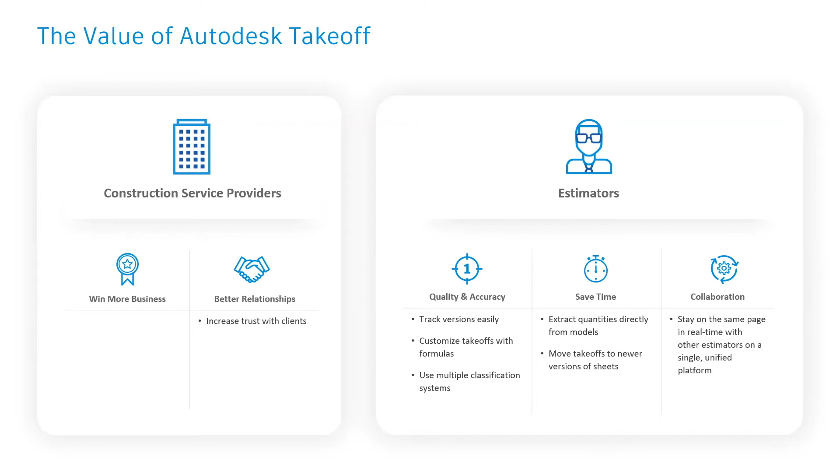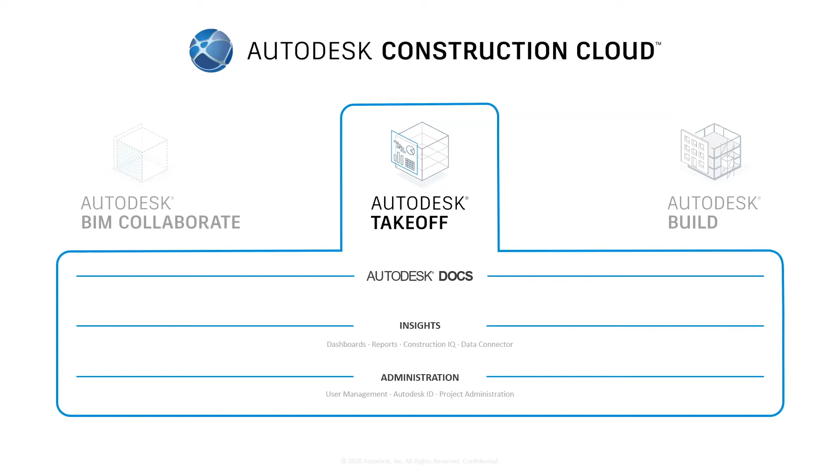Autodesk Takeoff is just part of our unified platform for the Autodesk Construction Cloud. The Autodesk Construction Cloud connects data, workflow, and teams throughout the entire building lifecycle, from design to operation, across headquarters, office, and job site. We recently announced 3 new additions to the Autodesk Construction Cloud: Autodesk Build, Autodesk Takeoff, and Autodesk BIM Collaborate. They all build on a unified platform, the common data environment, and these new modules empower general contractors, different trades, designers, and owners to drive a better business outcome.

So this is where Autodesk Takeoff resides in the platform. Now let's deep dive into what it means for you.

Autodesk Takeoff supports teams, projects, and business in an interconnected way. For teams, it provides every team member with the specific tools they need to do their job and collaborate with others, while supporting digitalization of tasks and centralized capturing of data. For projects, it manages all project documentation in one place to ensure everyone on the team is working from the latest data sets, leveraging data collected by teams to drive efficiencies in the takeoff process. And eventually for business, it helps streamline organizational improvements and increase innovation to win more profitable work. It's all about connected team, connected workflow, and connected data.

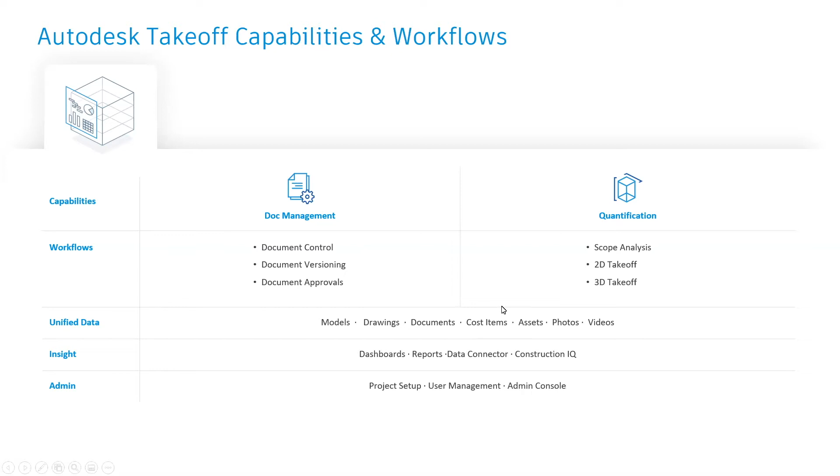So this is a closer view of this overall platform and the capability of takeoff and workflows. Down here we have document management to save all the documents on the platform, and we can extract the information to perform 2D takeoff and 3D takeoff, and eventually aggregate all the takeoff results into one place for users to view all this important data.

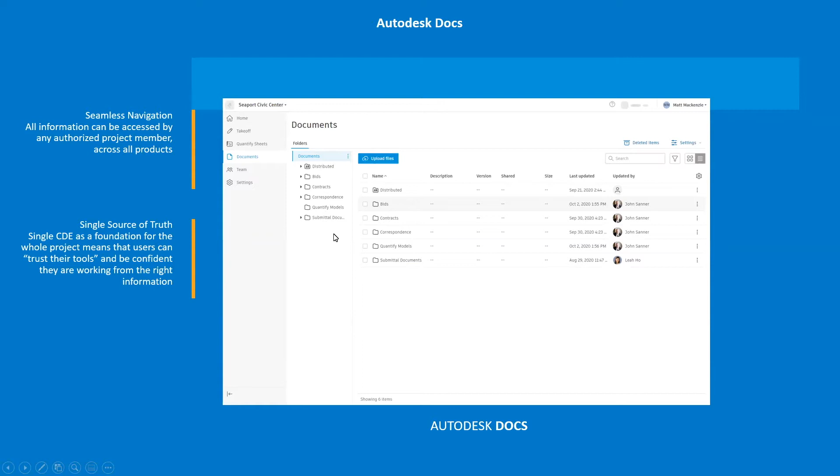From here we have the module selector to select the different modules. This is the interface of our document management, where you can save all the essential data into it to eventually achieve a single source of truth.

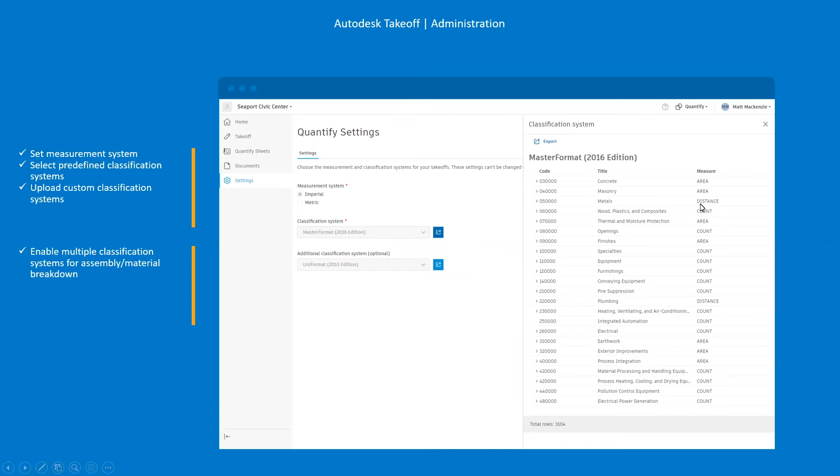In this interface we can set up different classification systems. Later in the real demonstration I will show you how to set it up. From here you can map with your current classification used. If you use SMM4 or Uniclass, we can upload those standards into the platform and finish mapping the unit with the quantities and elements over here.

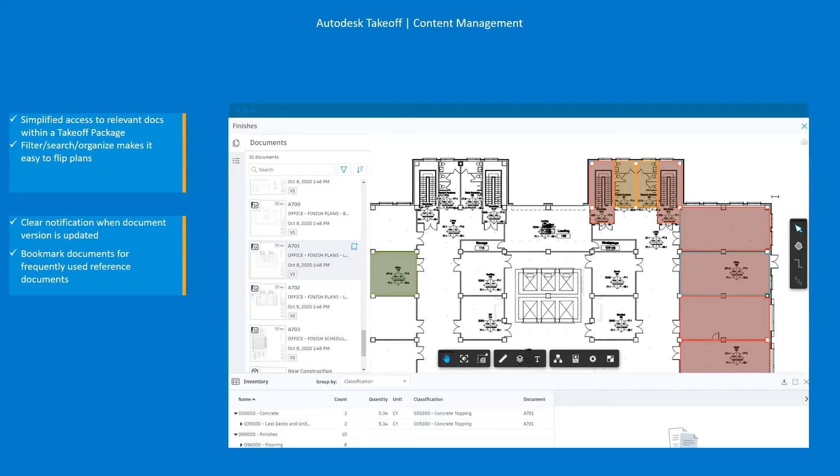Taking up the quantity is really easy. You just need to mark up the space, and it will give you the idea of how big the space is. You don't have to apply complicated formulas to calculate irregular shapes. You just do the markups, select the space, and it gives you the quantity right away.

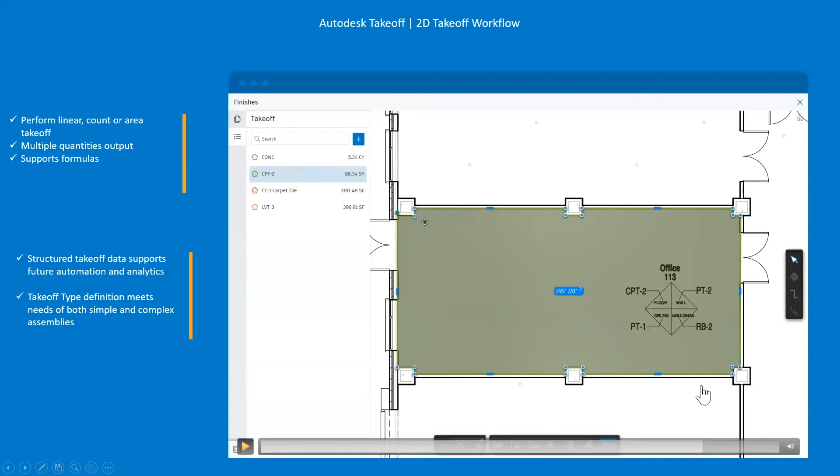From here, this is some of the demonstration. You can just select the entire space, click enter, and it will give you the quantity right away. This way you don't have to cut out all these columns, memorize the size of the place, apply formulas to calculate the whole space and deduct quantities. The only thing you need to do is mark up the space, and the quantity will auto-populate directly for us.

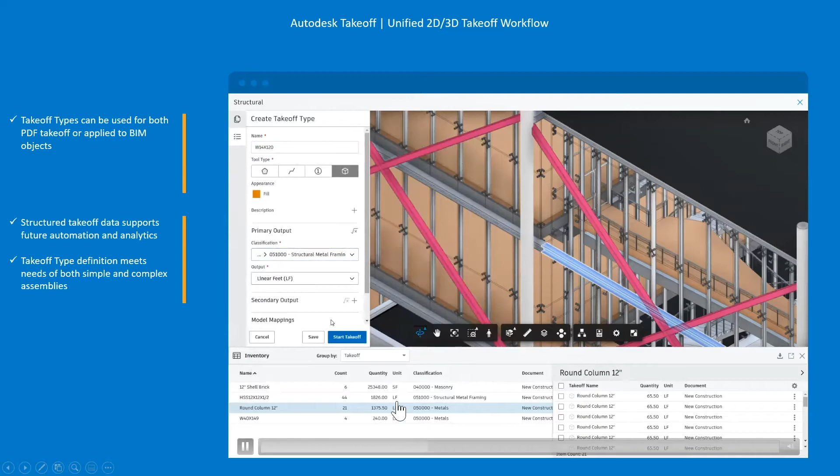This will be even simpler in the 3D perspective, because when it comes to 3D, all the information is residing within the 3D properties. So what we need to do is, from this platform, extract that information from 3D and convert it into the quantity, so you can have more structured quantities with all the accurate information generated from the 3D takeoff process.

Eventually you can merge all the data from the 3D and 2D takeoff results into one unified interface. From here you can see the total quantities and the breakdown of all the categories. The reason we promote this in one single platform is that we can establish the linkage between the takeoff results and the documents.

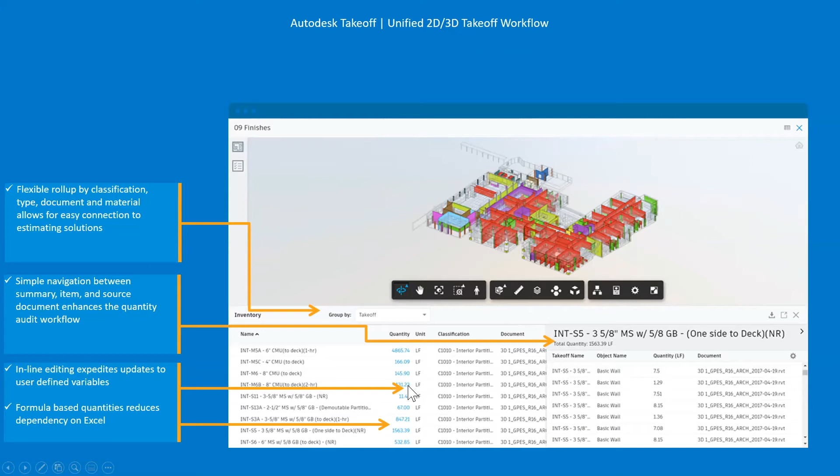So from the place you can directly select the documents. They will lead you back to the individual sheets or 3D models to show you where this takeoff result comes from, which further helps you validate this information at the end of the day.

And eventually, once you finish the takeoff, you can share the information across the teams, and everyone can work collectively and collaboratively to do the takeoff together. So this is the meaning of doing everything in this one single platform.

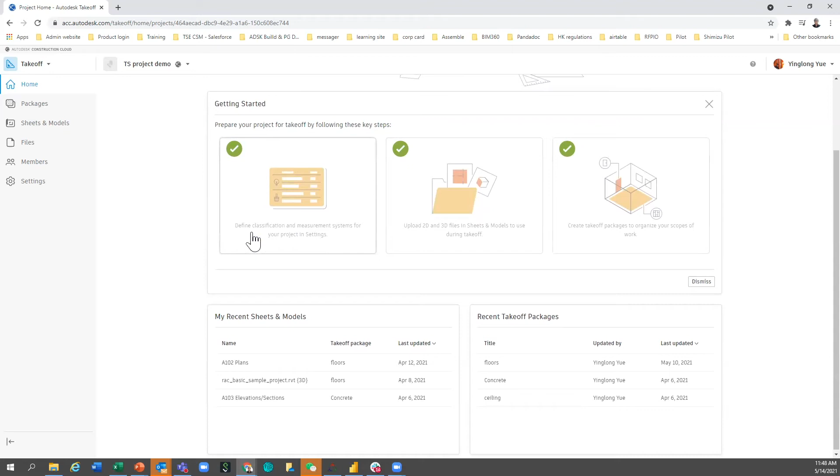This part is for us to set up the classification and measurement systems from here. In Hong Kong context, we usually will choose metric, and then we can have a different classification system embedded in the system. From here, you can import the information from Excel, and the system will do the matching automatically. According to the local standard, if you have an SMM4 matching table, we can also read it into the system.

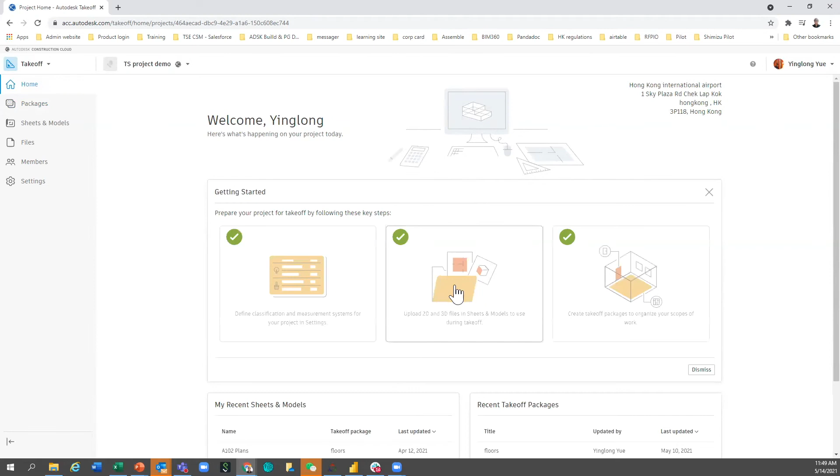The next step is to upload the information into the platform. So right here, we have all the 3D and 2D information. Uploading the information is really easy. You can just click the button and upload any information from your desktop, and the system will automatically read the information from it and try to populate this information into the system.

So as you can see, what we have here is the OCR technology, the optical character recognition function, to read all the information from the sheet drawings you just uploaded. What it does is recognize the information and then auto-populate the sheet number or the project title for you.

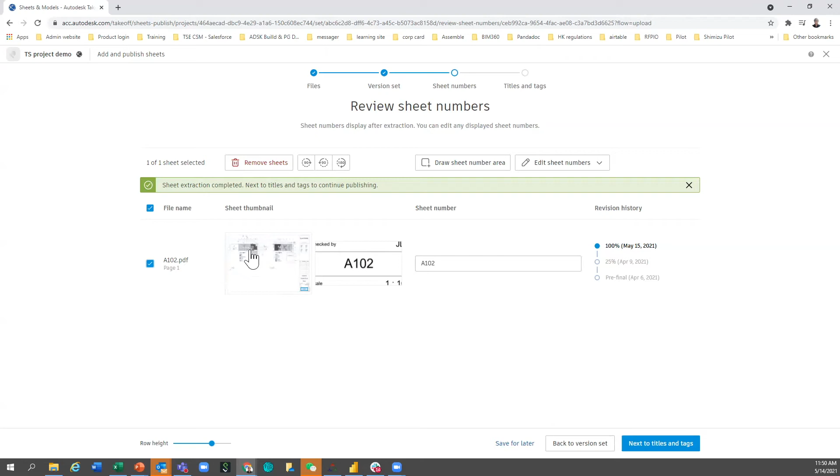Don't worry if it reads in the wrong place, you can always change the selection to somewhere else and get the information out of it. The powerful optical character recognition function allows us to read all the information from the PDF sheets and then do a smart search later on in the takeoff process.

As you can see here, it can also read the title sheets. But we also have the flexibility to choose the place to ask the system to read. For example, here I just want it to read this sample house instead of the plans. And we have a fair bit of options for us to choose.

You can choose traditional Chinese, simplified Chinese, and other systems. We also have different orientations, since sometimes the title block is not always horizontal—it may be vertical, up or down. You can always choose accordingly so that the system can accurately read the information.

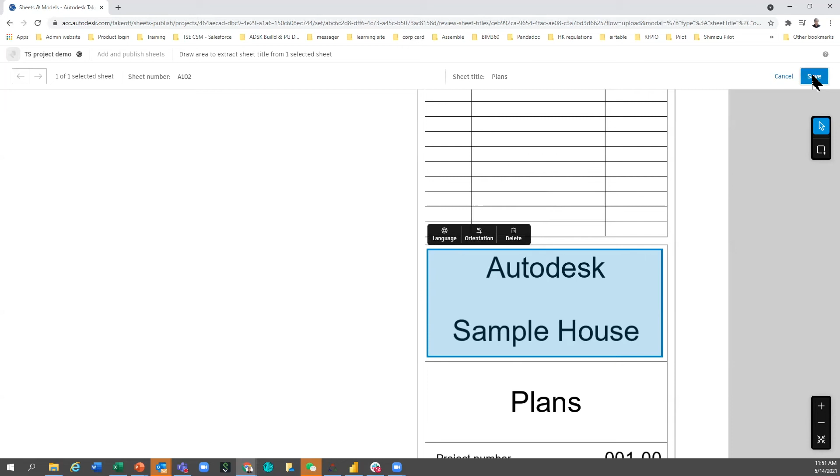Once you select the area, the system will try to convert and scan the place and auto-populate the sheet title for us. As you can see, based on these changes, the information has been populated. From there, you can publish the sheets, and now the sheets have been successfully published into your project. This is how we upload all the drawing sheets into the projects.

In terms of 3D model uploads, it's even simpler. What you just need to do is find the 3D model and open it directly, and now you have your 3D model. Although it takes a little time to upload the 3D models, once it's done, the 3D model will reside in the platform forever.

When it comes to packages, you can create different packages to collaborate with your team members on the quantity takeoff together. If you want to break your packages into different categories, you can do that. For example, if I just want to do a column takeoff, I can create a package for columns.

When we go into the column package, all the updated information like drawings or BIM models is already uploaded in the data set. So what we need to do is find the right information. I want to search for third floor and take off all the columns for the third floor, and now I'm able to go into this 2D view.

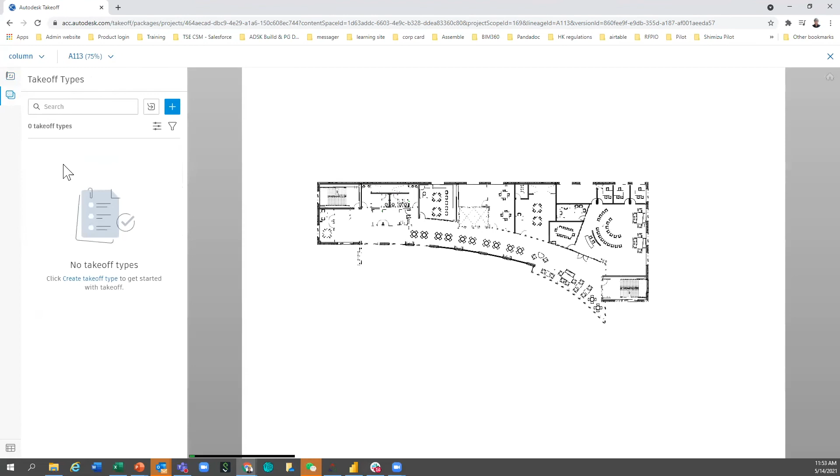Creating a takeoff is as simple as this. If we want to measure all the columns, unlike the original method where we have to count one by one, here we have various options to choose from. We can choose the area of the columns, the linear, or the count. In this case, let's do a count, so we put in the name of the column and select count.

When we choose count, there are different appearances to choose from. I'll choose a check mark and the green color. You can put in your own descriptions, and this is the important part: if your column is not matching with the count or the areas, this is the place for you to choose.

Based on the pre-settings, you have the classification map with the unit. If you want to choose certain things like doors, it will change the unit from areas to count. This is the place where we can do the matching according to the local standard and requirement.

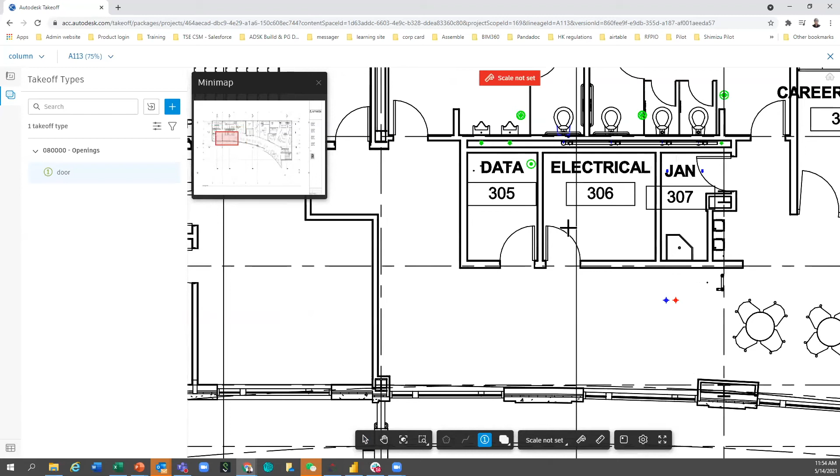Let's do a takeoff — instead of columns, I want to do a door takeoff. Let's do the door takeoff. Taking off is as simple as this: you just click the place where the door has been taken off. The system will automatically register the number of takeoffs, so you don't have to memorize this or populate it into a separate Excel sheet to take off all the quantities of the door.

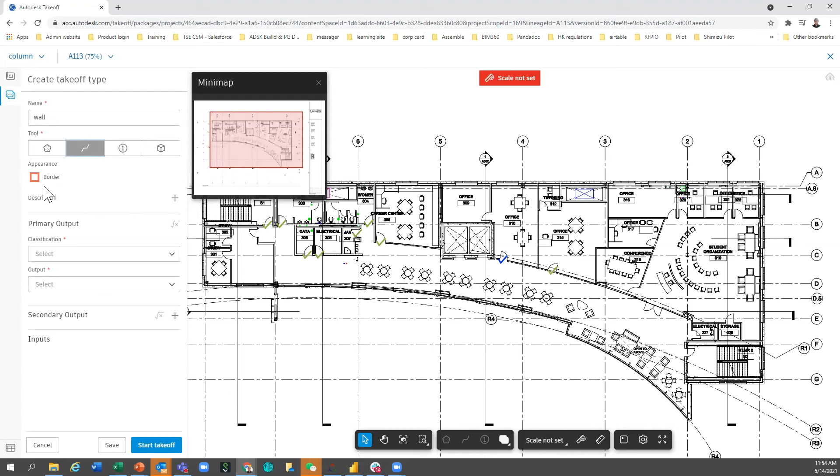What if we don't want to take off quantities but instead want to take off the wall area? Then you can select linear, and down here choose the right unit of square meters. You can also put in an additional dimension, because in 2D it's very hard to find those walls or calculate the wall area. So here we need to tell the system the height of the wall.

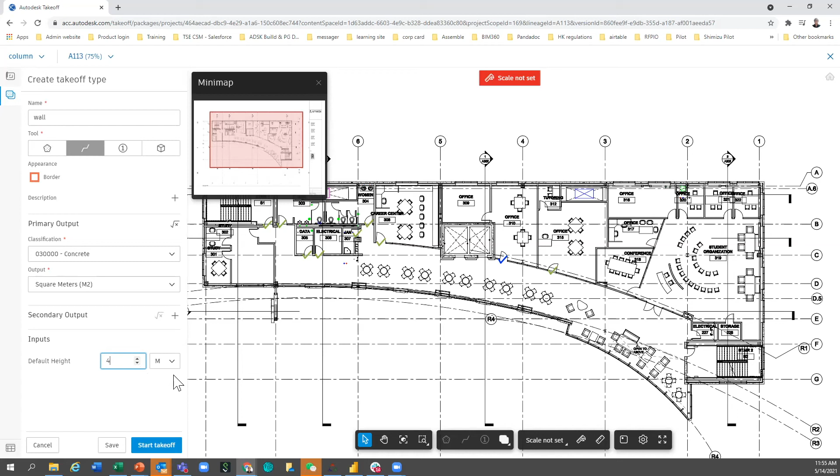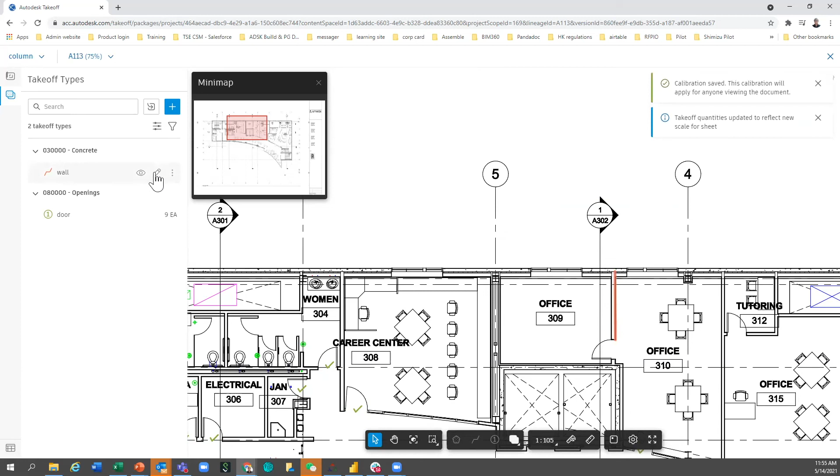Now you can select the wall elements, the length of the wall, and the system will automatically calculate the areas. But before any calculation, we first need to set up the calibration — find any known dimension. In this case, the green line is 10 meters apart, so you set your dimensions this way, and now you have your wall areas taking place from here.

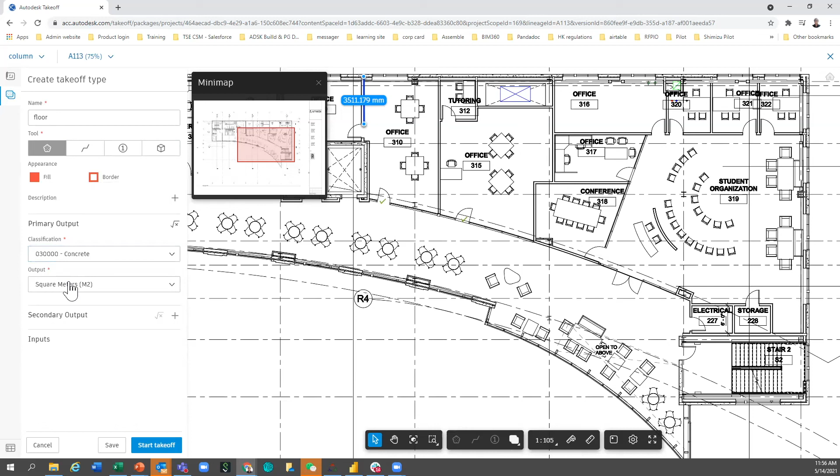Someone may ask, what if we want to do areas? Of course, we can do an area takeoff. What we need to do is come here and select the areas, then choose the different color coding to match with the areas. To take out the quantity from the areas, you just measure the space, and the system can automatically calculate the areas regardless of whether it's a regular or irregular shape.

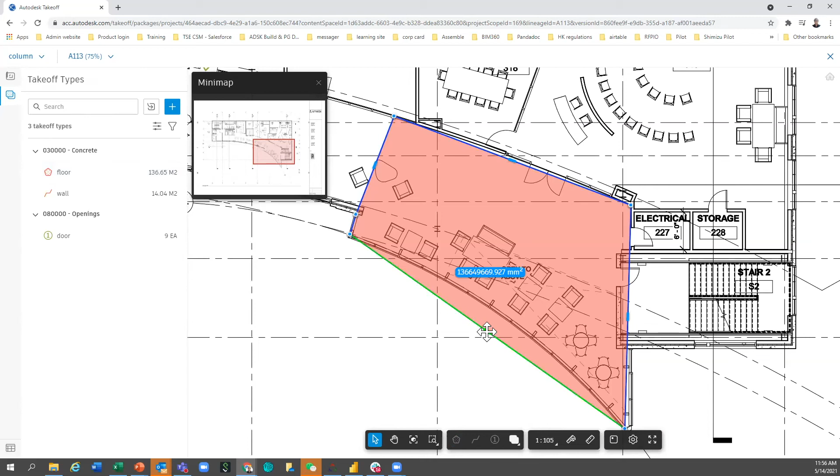They can all do it in the system itself. And don't worry if this one is not matching, because we have the ability to change it into an arc. By changing it into an arc, you can actually adjust the dimensions and shape of it to make it as close as possible to the area you're taking off.

And now for this irregular shape, as you can see, you don't have to do any computations with complicated formulas. They can already compute the whole area of this shape.

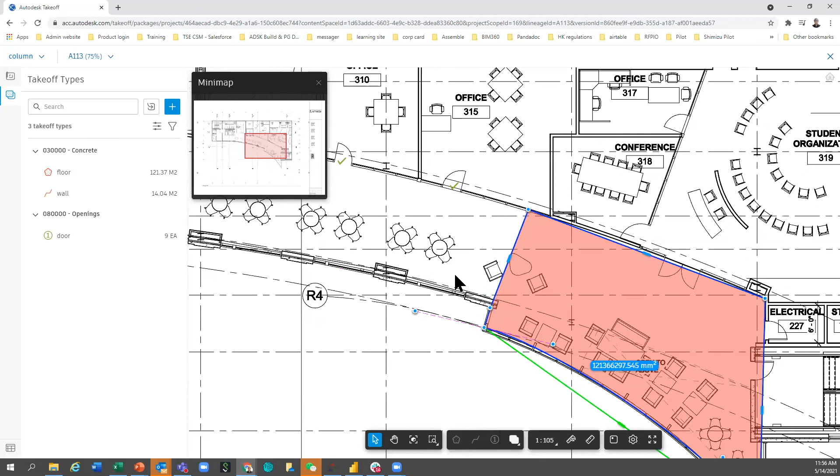And sometimes you want to do it simpler. What you can do is come here, draw a dimension at first, and then turn all these lines into an arc line. There's a shortcut for doing that - you can just turn this one and press A. They will try to match with the dimensions as close as possible.

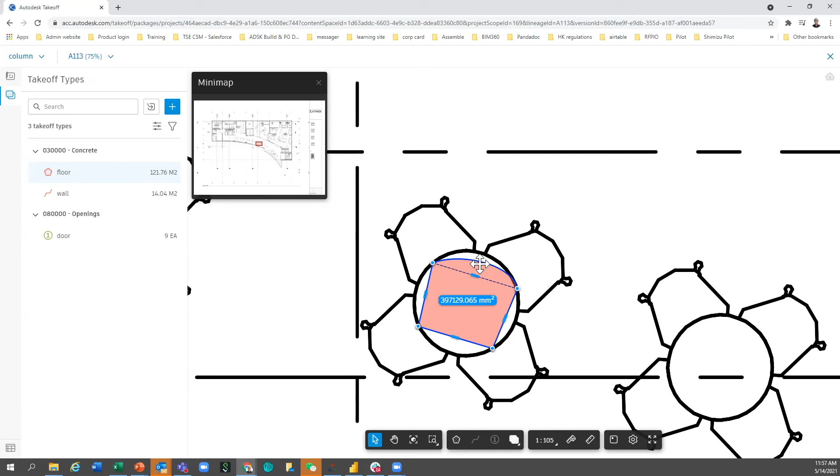So this is one way we can actually create an irregular shape in the floor plan, and they can simplify your whole takeoff experience. And what if we want to do something with 3D?

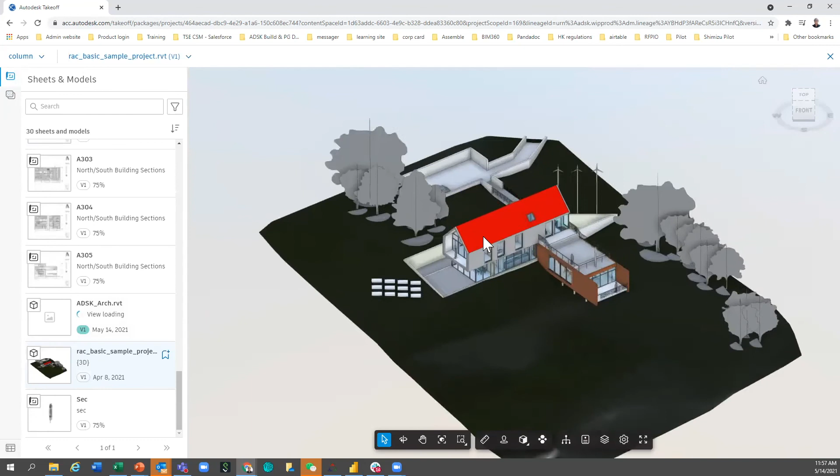So here we actually have a 3D model, and taking off in 3D is even simpler compared to 2D, because down here, all the elements actually have a parameter embedded in it. So as you can see, we can read the area of this roof, the volume of the roof.

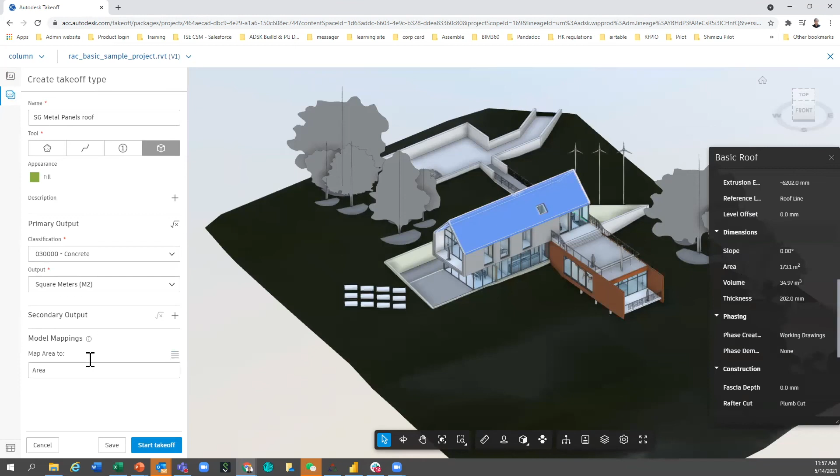So taking off is just like you select the elements, and as you can see, the roof has been automatically selected, and then you just need to find the right units. Here the system will tell you which area they will extract. So in this case, this is the area they are going to extract, and now we just need to tick this one, and the area has been taken off.

And sometimes the QS or the estimator may have a concern - I don't know how to navigate this 3D model. So is there a better way for me to take off the quantity from the 3D? Yes, we do have a better way.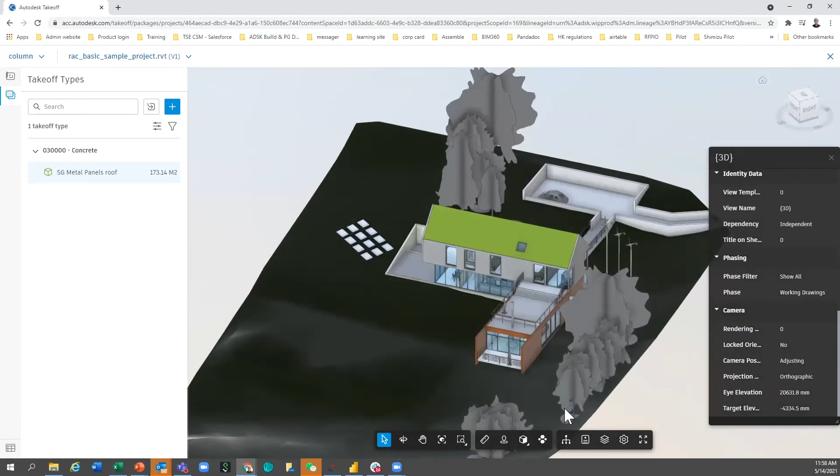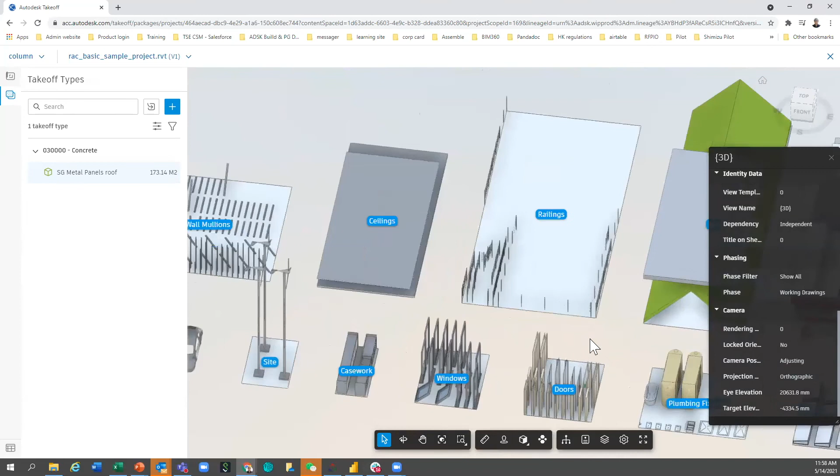What I want to do is just go to a specific type of model, and then I can select it and do a takeoff directly. Or I can choose the whole category of elements, and then do a takeoff accordingly. In this case, we can choose doors, openings, and they already have this takeoff in place.

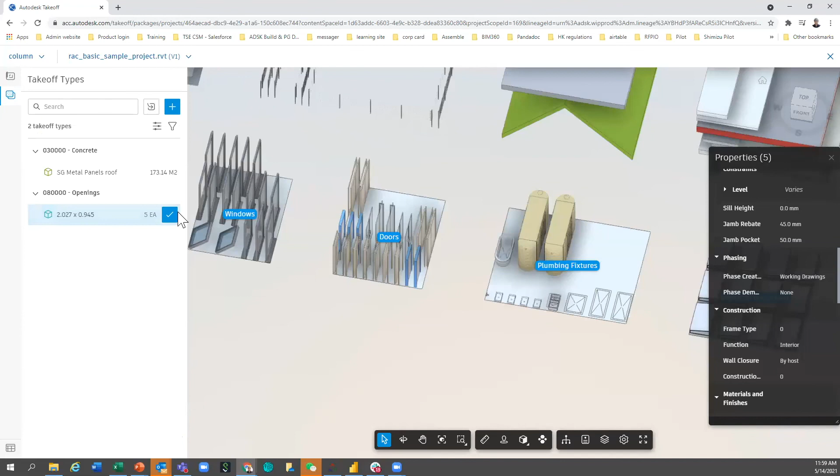And after you finish all the takeoffs, eventually what we can do is go to the detailed takeoff, the inventory type over here. As you can see, all the quantity we have just taken off is already here, and they even have the breakdown of the takeoff.

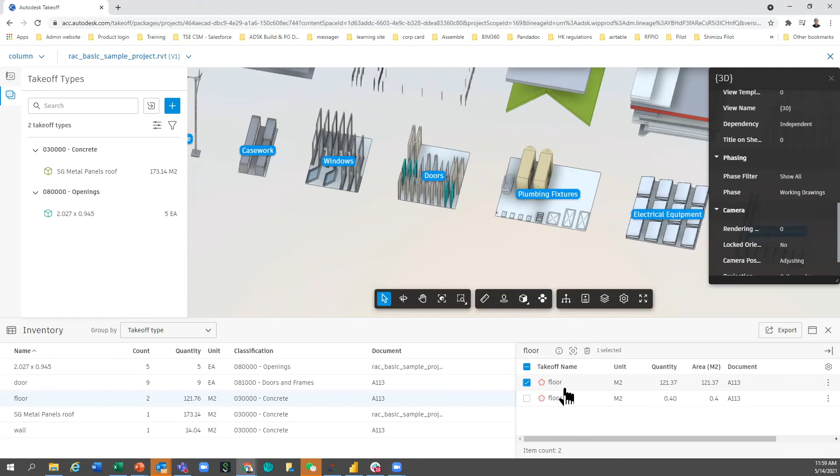One good thing about our system is that everything is connected. So from here, you can directly go back to the documents, and they will show you where this takeoff took place. You can simply click this focus button, and it will lead you to the right position.

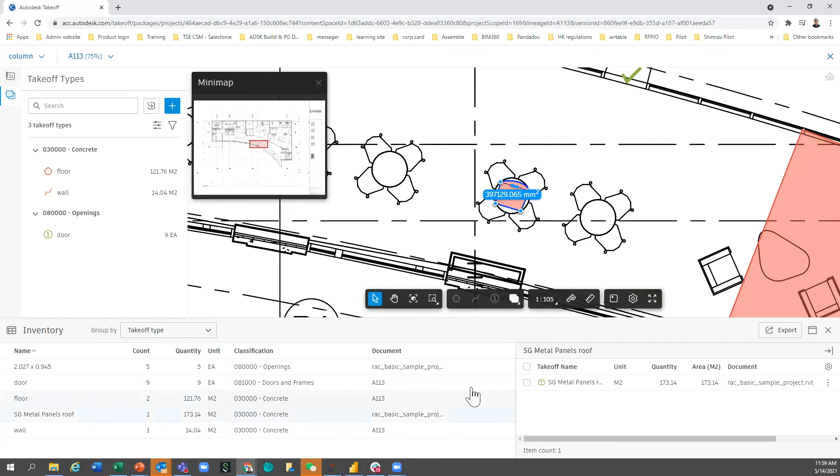So from here, you can also see different takeoff results. Even when it comes to 3D, you can do the same thing, and the system will automatically identify this linkage and bring you back to the right place.

And eventually, when you have the entire reports ready for the takeoff quantity, you can export this into Excel. This will help you do the cost estimation and finish the whole BIM-based cost estimation process.